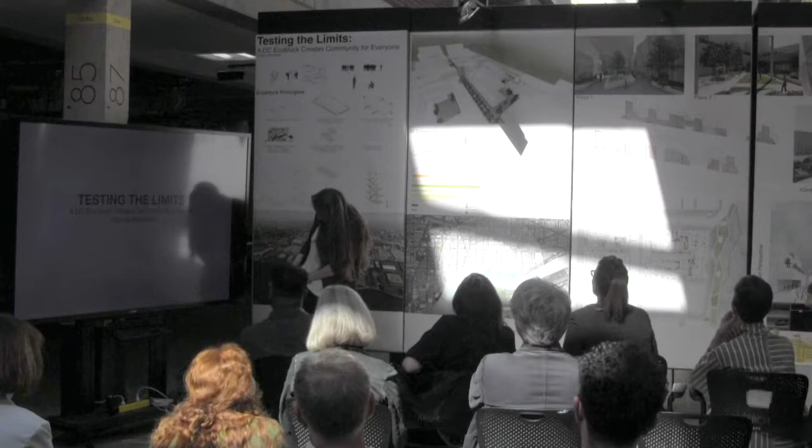Welcome, good morning. My name is Tricia Rowedder, and I'm going to be talking to you about testing the limits in DC, an EcoBlock that can create a community for everyone.

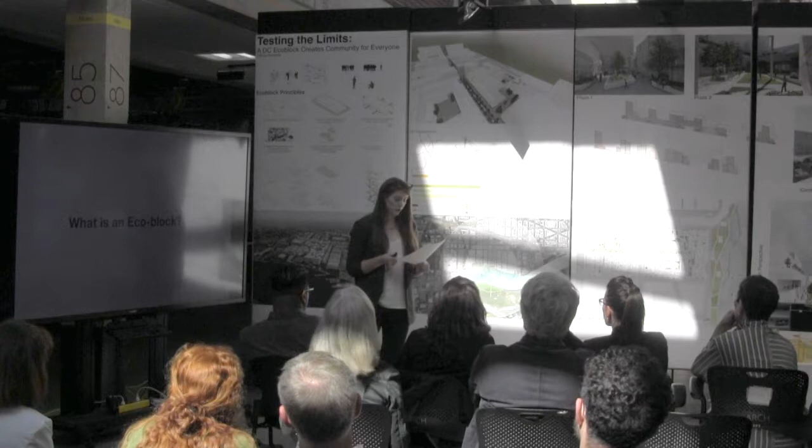This thesis explores the development of dynamic interior and exterior spaces throughout not only a building, but an EcoBlock system, so that forced and happenstance connections and interaction of people are created as a means to revitalize community in DC. This new EcoBlock requires both interchangeable as well as permanent pieces. So to start at this massive scale proposal, how do you start?

You start with 7 principles. A large area, major connection, car circulation only on the exterior of the block, porous public connection throughout the block, dynamic program, not only through horizontal applications but vertical as well, equal access to amenities for every program as well as exterior space, and then of course light and air. So from these principles, I derived an even further set of rules to help actually design this thing.

First of which is circulation. I split up the site into 4 cores, and each core has access to circulation that occurs beneath the site. And then each of those cores have a drop-off zone, a service zone, as well as an HVAC system room.

And so this service circulation happens only on the exterior, but I've allowed for emergency vehicles to travel through the center, only emergency vehicles. The rest of the vehicles will solely travel on the exterior of the block, whether that's service or typical car circulation. And then I've designed drop-off zones, which are these green ones, as well as parallel parking along the street front.

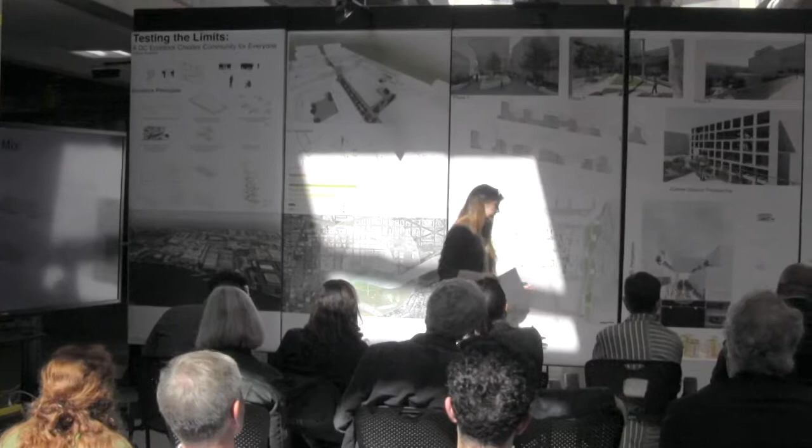And so dynamic program mix, it might be easier to see in the model, but I've mixed the program all throughout the block, and I've put it into 4 categories. Yellow is residential; red is retail, commercial; green is an innovative office that I'm proposing, and then orange is food. It might be hard to differentiate the orange and the yellow a little bit.

So I'll keep getting into that as we progress. For light and air, the courtyards I gave specific ideas and dimensions to as well. If you go up 2 stories, you set back a certain amount, 25 feet. If you go up 3, 30 feet. And you can see that on the interior corridor, I've done the same as well, where this dimension, though, is a bit smaller because this runs through the whole site. A courtyard might have more flexibility in how they shape their spaces.

So density. To tackle massing of a large scale, I had to think about how do we start with this. Looking at different sizes that would be good for certain types of program. So 50 by 50, 75 by 50, and never getting larger than 125 by 75. This allows for a good mix of program, whether it be residential, office, commercial. You're able to manipulate these. And then the smallest dimension, 75 by 25, if it got any smaller than that, I considered it an unusable space, and so there wouldn't be massing there.

So, jumping into the site. So where are we in DC? We're in the Washington Navy Yard, and I chose this site largely because it has a lot of great connections to the city, and it's a very developing area as well. But also more locally, it has the metro, it has the Nationals Ballpark, great access to the water. This is my site. And then it's flanked by the Anacostia as well as M Street, an active corridor.

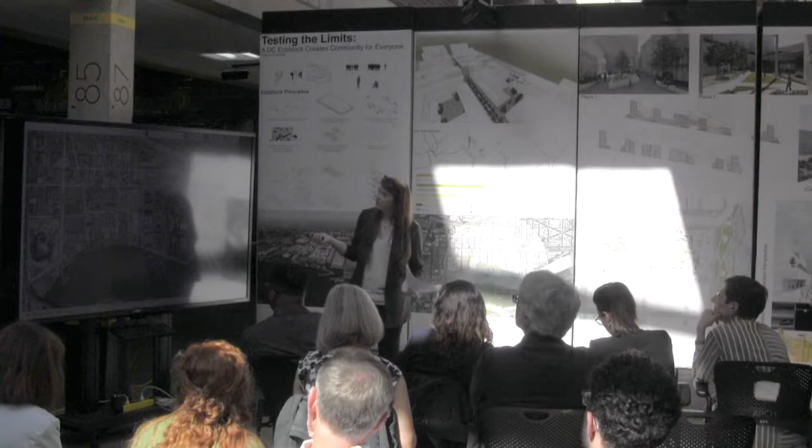There's a variety of parks and schools as well, and so when starting to think about the program and this innovation center that will start to bring people not only for jobs and activities, but also start to engage the waterfront and perhaps bring the kids from the local schools and the offices as well.

And then I proposed new roads. So as you can see, the road here didn't align with the street above, and as well this one didn't connect through either. So I connected both streets and then provided an access through the center of the block as well. Block extents: my site was 400 by 1,000 feet.

So how did I start to mass it? I broke it down into a major axis, one going north-south, connecting M Street to the waterfront, and east-west to the new streets. I stepped down towards the waterfront to allow for the light and air to be able to get into these spaces that I'm going to start to carve these courtyards out of. And then at the end, I stepped back up to allow for that opportunity of development along the waterfront.

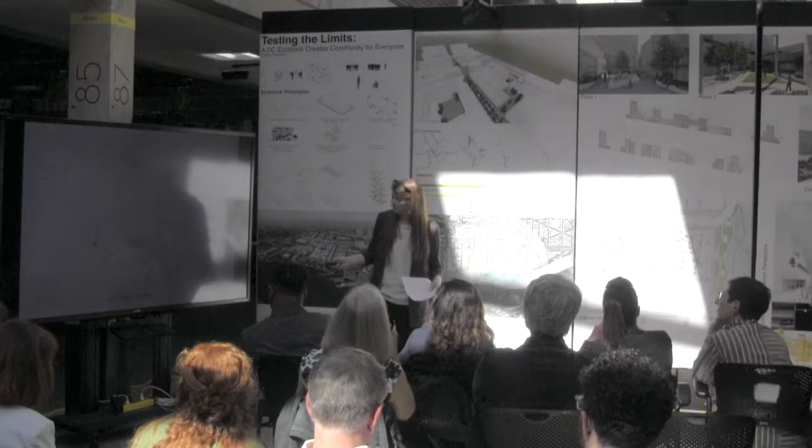Then I located different nodes of interaction that I was going to carve out, locating based on current site conditions and programs surrounding how big and where these were going to be. Next, I carved out each of these blocks, varying in sizes and opportunities of program and connection all around them. And lastly, you have the EcoBlock.

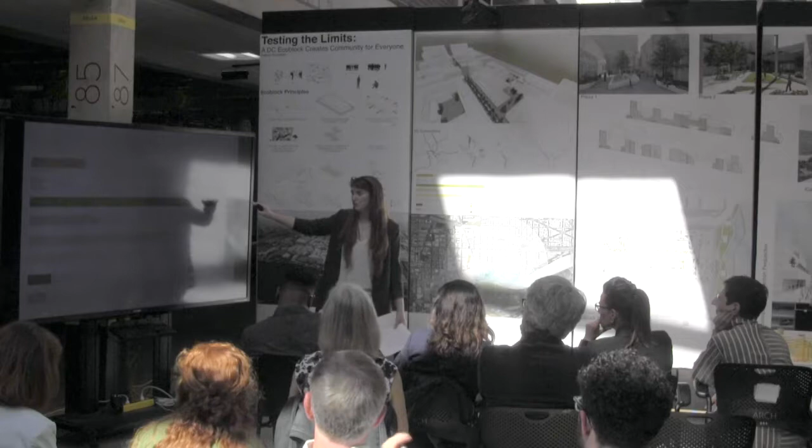So, in my EcoBlock, looking around to the current community around it, this is food, this is the local community, this is how much I have on my site. Green is office and institution within the quarter mile, and the lighter one is my site. And then again, it goes residential and then retail. So you can see I tried to have a mixture of program that correlated somewhat with the population in the area and the rich development that's starting to occur.

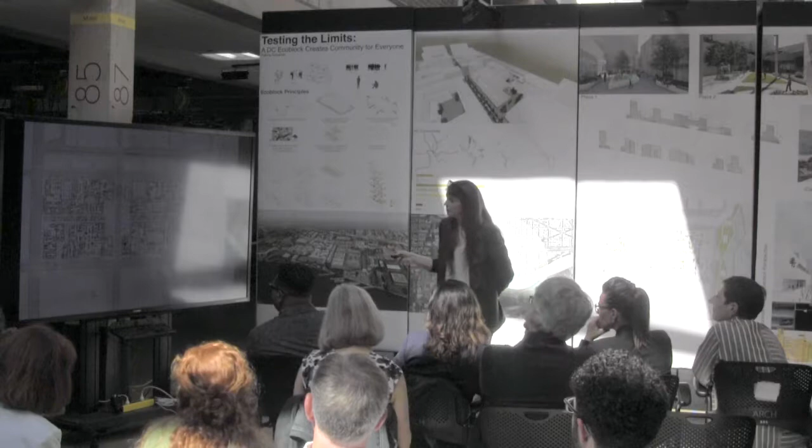These are some of the courtyards, the landscape that I chose to connect these quadrants that I designed. Sorry, it's hard to see. And so the ground floor plane, I did a mixture of retail, office, and residential here, as you can see, and we went through this a bit as well. But I designed it so that it could be divided up into parcels. This is how I divided it up, but let's say you wanted to divide one piece or this piece, you could completely sell it off.

And so I started to look at how could this actually develop? Who would want to buy a piece of this? How could you break it down and still create these rules and set of guidelines for someone to come in and design and develop a piece of this, but still fit into the whole? And so each of these pieces correlates to that, how I did my massing for it. But theoretically, they could be developed a little different if following these guidelines.

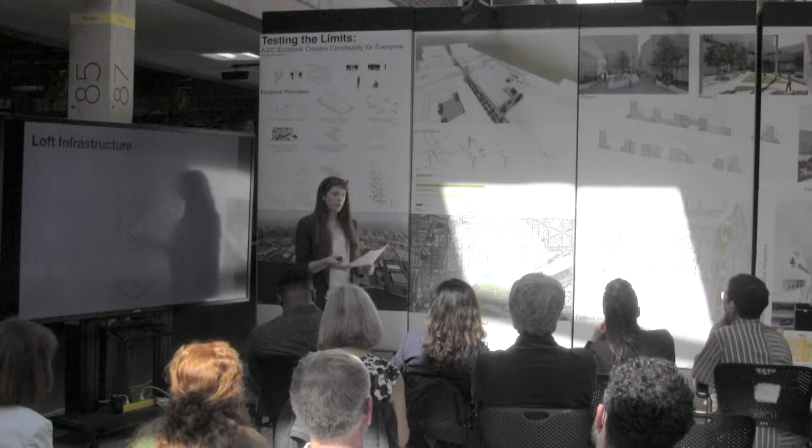So, loft infrastructure. I chose to use a loft as the type of construction for my site. It utilizes a flexible and open framework that easily adapts to changing cycles of use and maintenance and creates a community that can continue to flourish and adapt over time. So building in this modular way, I'm able to create a more resilient site that can last in the long term, as well as accommodate all the different changing lifestyles that occur in an urban city.

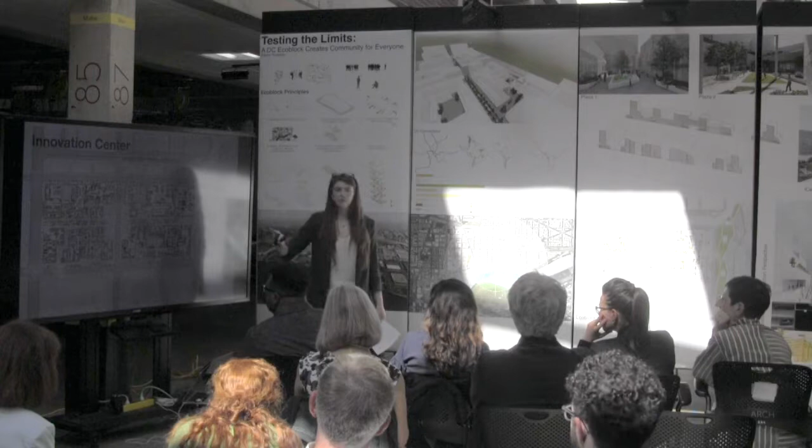So creating this new EcoBlock neighborhood addresses this need for real social networks and a sense of belonging in a highly individualized society that we're in today. So diving a bit further into detail, I massed the whole site and developed the ground floor, but then I jumped into just one parcel of it, one building, the Innovation Center, and this would act as the hub of the green program I've designed that's connecting the whole site and the entire block.

And so reading this plan, as you go up, the blue is going to be open to below, and the orange is the privatized spaces. So on the exterior, the party walls, I aligned my cores, and then I developed a mixture as you go up through the floors of different types of interaction, whether that be closed office spaces, open office spaces, meeting rooms, collaboration centers, classrooms, labs. And then I also included terraces. I started punching into the facade because of this easy floor plate of the loft design. I was able to manipulate it very easily.

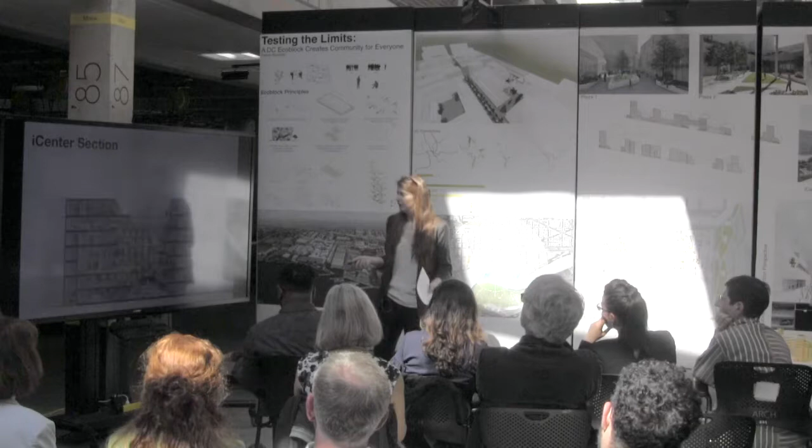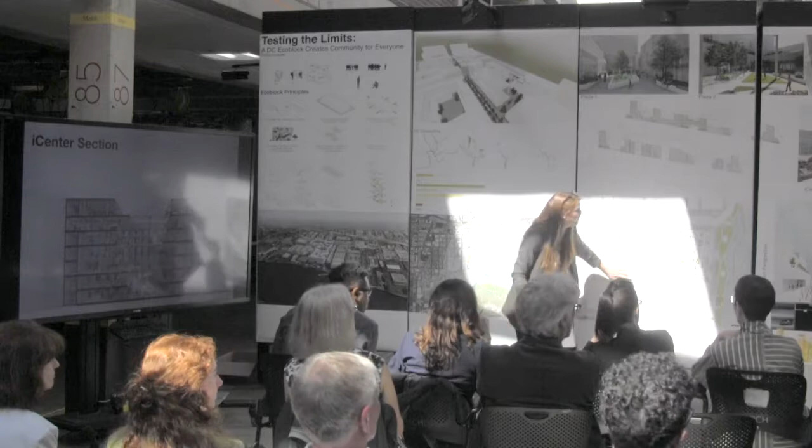So if you're looking at the section, you can see some of these different types of interaction all throughout. Yes. I'm a little lost, so I don't want you to go too far, because where is that in relation to that? Okay, so it's right here. Okay, so is this the same orientation, north is up? North is to the left on these plans. Yes. This is the entrance right here. Point that out in your ground floor plan there. Right here.

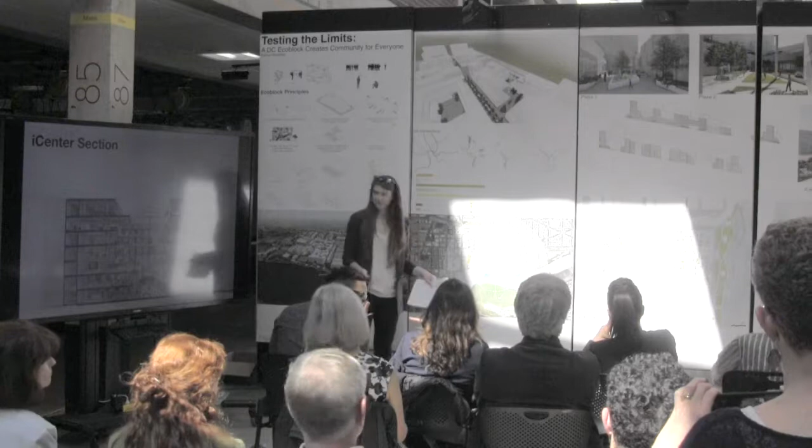So going on to these nodes of interaction and connection that I started with, looking at just a couple of these and their relations to the site around them, whether it's on the exterior or on the interior, looking at these meeting spaces and how they join the collaboration, the circulation zones, the dynamic lobby spaces, the plazas that connect these retail along with all these offices, as well as these terraces and how they relate to the adjacent areas. And I'd like to conclude.

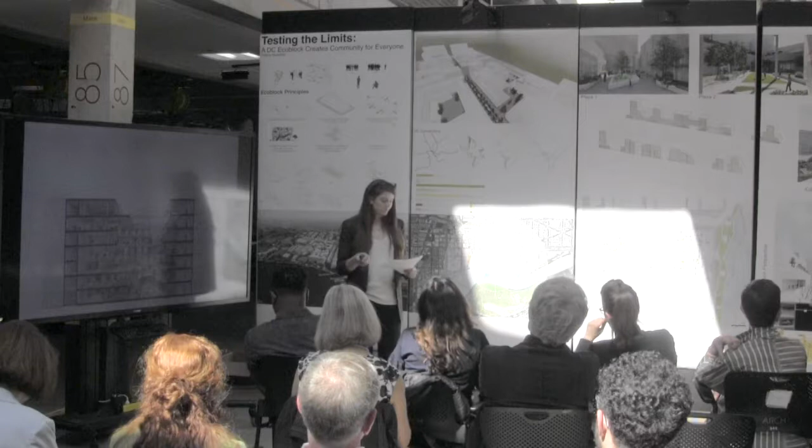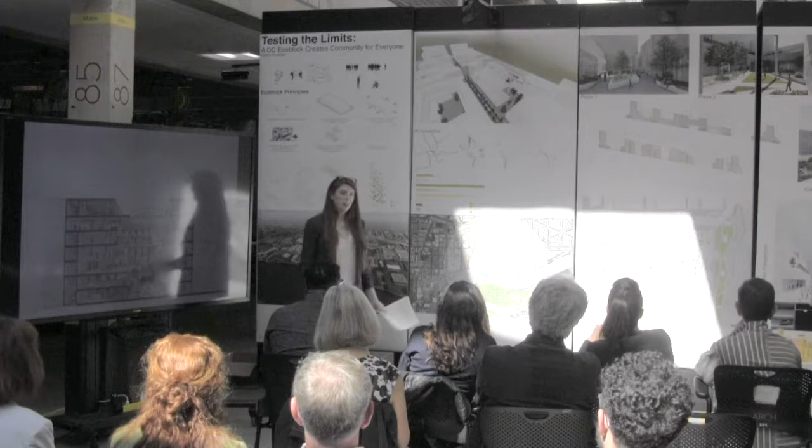So building in blocks can have a sense of inclusion and diversity and community by creating this spectrum of spaces that are a variety of scale and allow for engagement not only with one another but as well with nature. So not only does this present a possible solution, or at the very least an aid to this epidemic of loneliness in DC, but it can infuse the city with a sense of belonging and personal connections to one another, as well as their surroundings. I'd like to open the floor for any comments or questions or concerns.

Is this on? Well, thank you. It's an ambitious project. I've had a student do the same site, and it was very difficult, very big, very deep, and needed housing here. So it was an extremely difficult site. And I want to thank you, it's an ambitious project. It's ambitious and forward-thinking. In a sense, you're designing for the 22nd century of DC almost. Density is increased. It sort of reminds me of Osaka or Tokyo in terms of its urbanism.

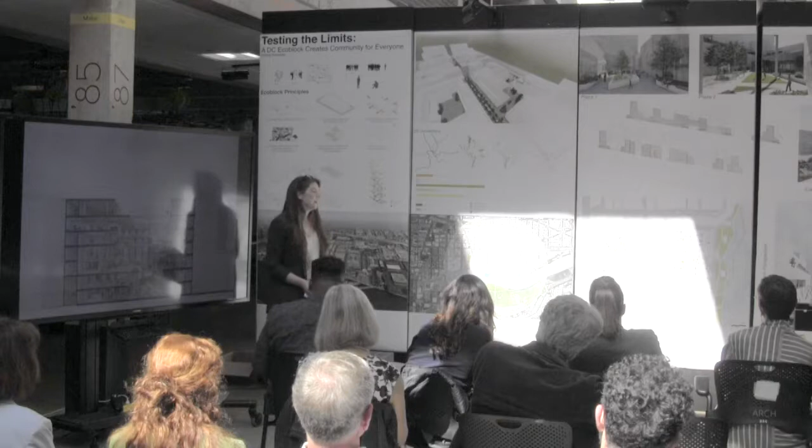Did you look at the Japanese, Asian cities? Yeah, I looked at a couple of them. I looked at Chinese superblocks as well, starting in this. I also looked at Metabolism and Archigram and all those different precedents when starting the process. What did you learn from those? Why do you think they work in Tokyo and in Japan, and how do they need to transform, or what needs to happen in DC for that to work here? Sure. I don't necessarily know Tokyo, Japan quite well. I know the movements at large and certain specific superblocks that I studied more in depth.

But a lot of them tended to fail because while they were implementing these big principles, they had the right rules that they set up, but then the follow-through fell through. And they created often very individualized pieces, and so this didn't really allow for interaction amongst people. I would imagine that in Tokyo, Japan, the population is also very high and that this might work as well. Especially in DC, I think it could work because of the increased population and the drive back to the city.

Well, one of the reasons it does work in Japan is the density. You go up 3 or 4 flights to get to a restaurant, and there's retail on the 10th floor because you have to. There's not enough street edge. Right. The ground floor retail and residential or office above is not the tradition. It's just you can't have it there. It's just too dense. So I think your project can work, but I'm not sure.

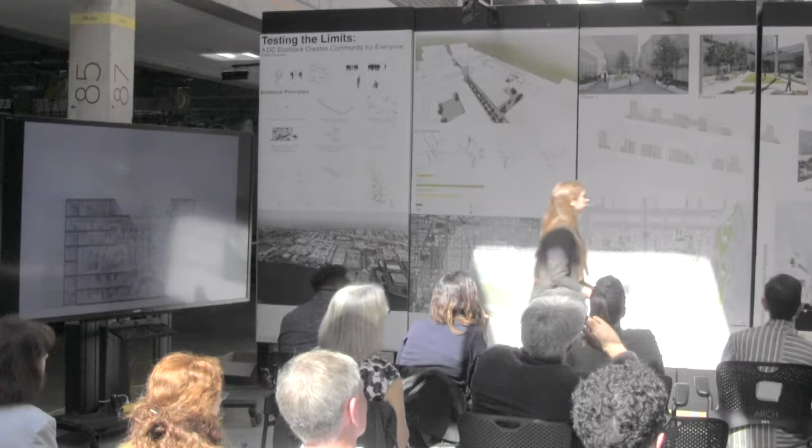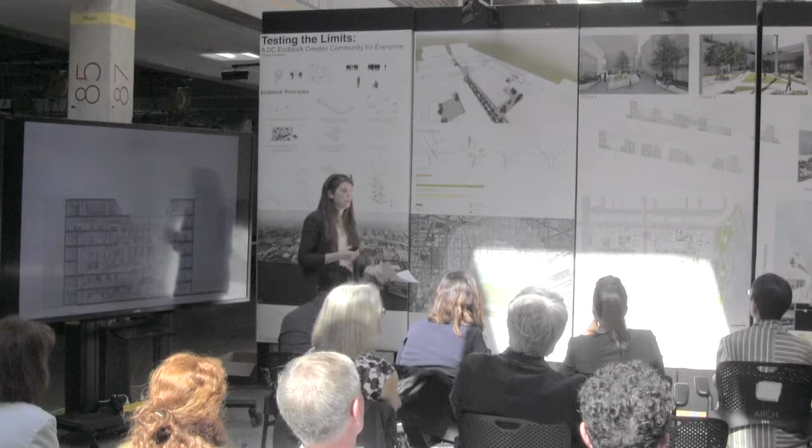Yeah, so for my building, I just did a very simple grid structure of the facade that aligned with the columns. It was more that I had to deal with my own taste, I think, really, than speaking to the site particularly. The idea with the loft building is that you have a lot of flexibility in how you can design the building, what you can cut out and what you can put up as a facade. So the design of it becomes very open-ended to those who want to design it.

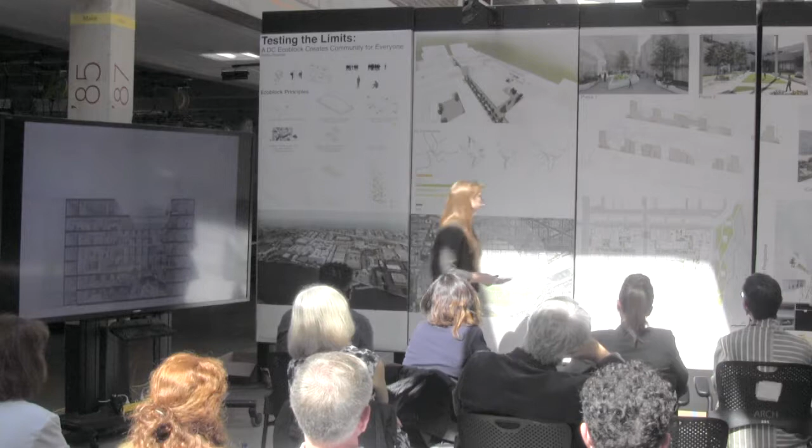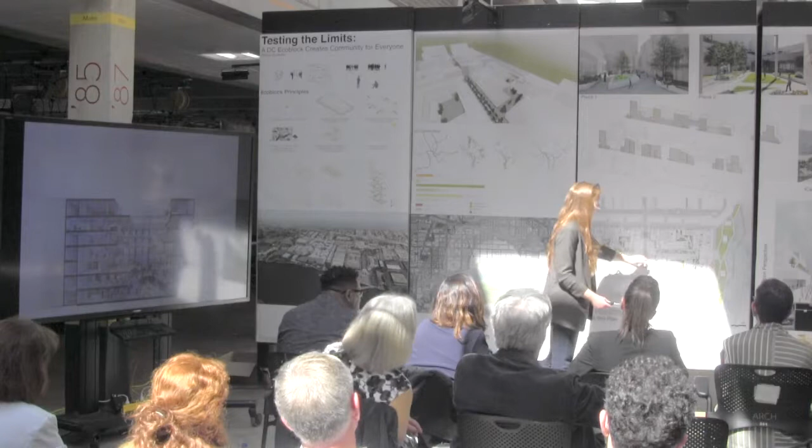As for accessibility to the site, I was also very concerned with that, which is why I tried to make very strategic points of access. This is a parking lot that will always remain a parking lot because it connects to the Anacostia waterfront trail, which starts just further down my site, and then it ends at a closed boardwalk before coming to the rest of the Navy Yard. That's a controlled point. So my site really now becomes the end of this trail until you pick back up a while up the river. I tried to choose very strategic points of access as well as give a lot of room between the buildings so that it appears as if there's a lot of space and it's very open and anyone can come in, because I think in DC we're often used to walking into big plazas and it feeling inviting.

So is the idea that developers would come in and develop a certain parcel of it, but the massing would have to match the preconceived massing that you have?

The massing could shift slightly, but the idea is that by following these principles, your building would turn out a pleasant building with experiences—that would be the hope of it. But the massing could shift slightly. I proposed a massing that followed these rules, and I guess they could, and a facade design.

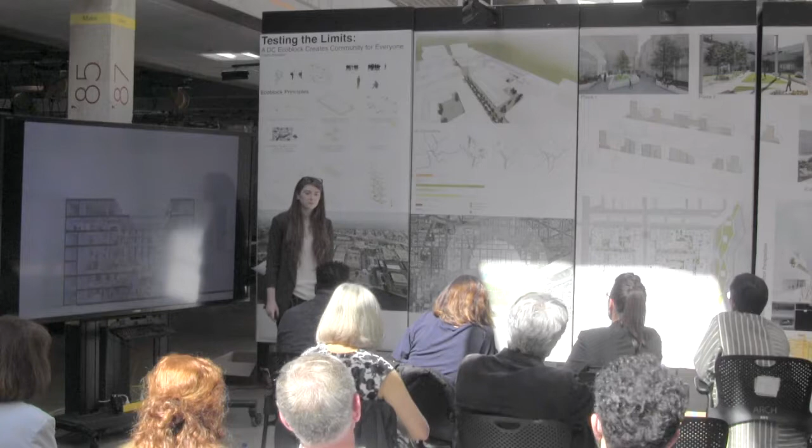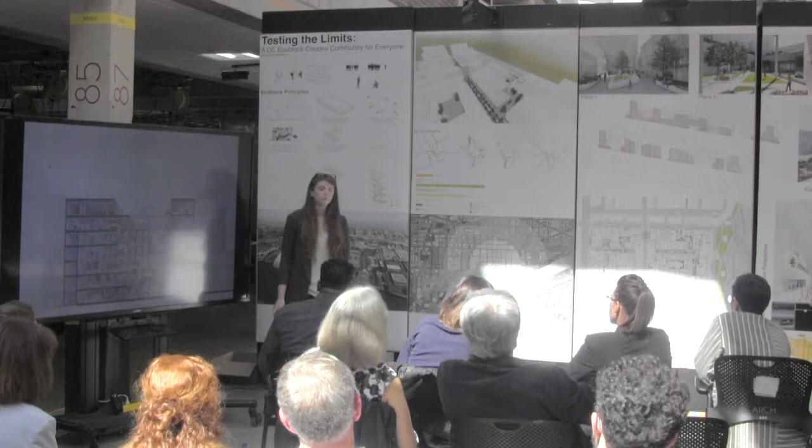Can you talk about—I think you started to get to the comments you were just making. I understand your principles, and I was trying to understand if you perceive this to be a completely developer-driven project, or if the intent of your thesis was to set out an approach to development. Your principles are great at a higher level, but it's hard for me to make the jump from your principles to the actual forms, and it's lacking a little bit more detail. I wonder what your thoughts are on why someone wouldn't just max out FAR and make the code work. How do you actually implement this? I say that in part because I think, in order to make this actually thrive, you need a slight bit more granularity as to how you actually begin to define the rules.

Yeah. Did you think about that anymore? I definitely did. I kind of dug too deep into details, I think, and at that point it got almost impossible to design the site as a whole, so I had to step back.

But I think setting up those three modules that you can use to build, and then requiring that you have access to the block as well as the courtyards, have to step back every so often, similar to how you'd think of buildings in New York with the setbacks. I think I was proposing a way to help control the development without fully designing every nook and cranny of it. So I was trying to make a feasible proposal that someone would see and then could come in and design part of it into further detail. I guess I don't know if that was getting at your question.

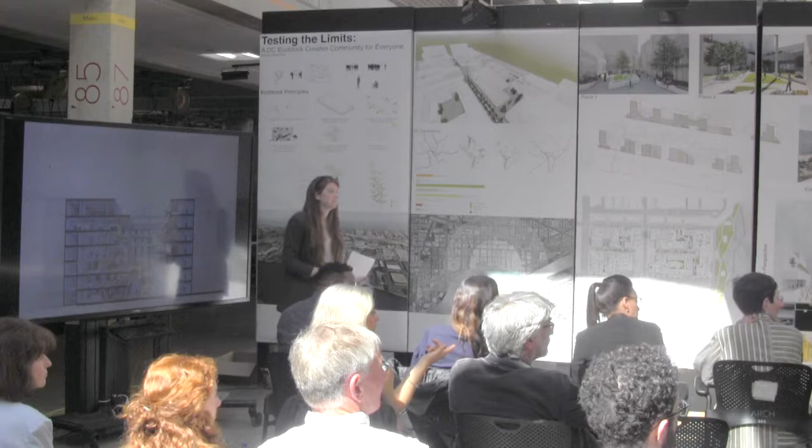One of the discussions we had, just to clarify—I was a late-breaking member of the committee—was this question of dimension and ventilation, and sometime in the future buildings get a little narrower because we want to naturally ventilate them. I think, Tricia, I would argue with one thing you said, which was that this is one way this could be realized. You lay down the basic cruciform with the square, and if you follow the rules, which aren't maybe completely articulated, there are lots of different ways that this complexity inside the block could take shape, as long as the outside does the things you wanted. I think that's one of the things we were talking about.

Right? Absolutely, yeah, absolutely. So a question I have—you talked before about creating community and that cars should remain outside. I think there's a missed opportunity in looking at some precedent studies for ways you can integrate cars and pedestrians, specifically Copenhagen. Copenhagen has a wonderful system where pedestrians and cars overlap safely.

What strikes me about it is that you have this super block and you've cut a slice right through the middle of it, and you've kind of done nothing with that big space in the middle. It seems like a really big missed opportunity.

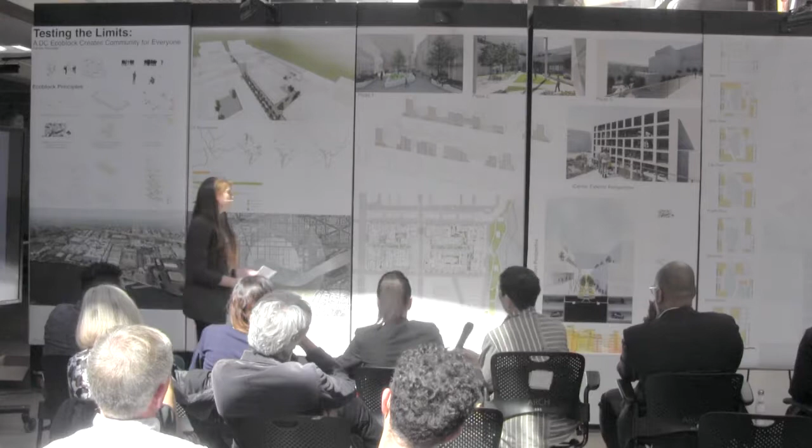Yeah, absolutely. So to the east of the site, if north is over here, I put a street, and I also developed on the east side of it something small scale, whether that be residential or something, to create a buffer between my EcoBlock and the Navy Yard, and allow the street to act as a uniter between these two sides rather than something dividing the fabric. To the west side, these buildings are slowly, if you saw in plan, stepping back as they reach my site. I was hoping my center would start to be this core, this point of activity, that would then spiral out into the rest of the site. So this would act as that catchment.

I do agree with you that I missed some opportunities in developing that further. I think I got a little bit lost in a lot of other things.

There's a huge scale thing where I feel like you don't even need to show a plan. You don't need to go into the intricacies of what's in it. Who cares if there's a table and chairs or not? I feel like it would do you well to step that back and just diagrammatically show, not dissimilar to how you're doing your initial work, how the space is used, how it functions, and how people will interact. It's for people, so you might do a series of those diagrams.

Yeah, absolutely. Thank you. I have a quick question on that. The non-innovation center floor plans on your ground floor plan, what program are they?

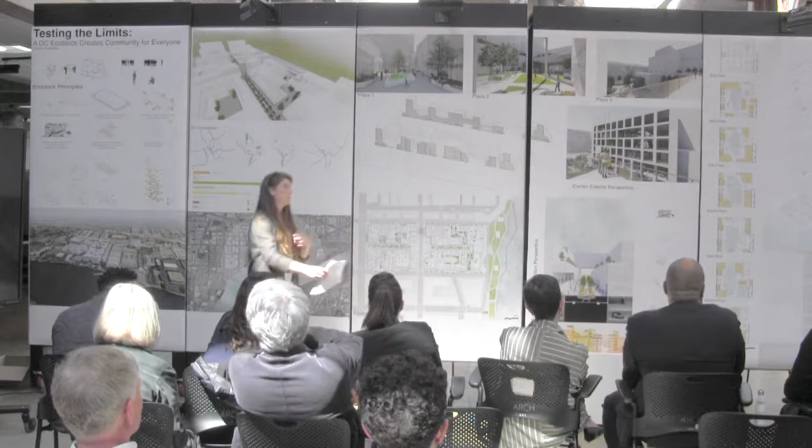So there's this issue of what's private and what's public, and so I started to define some more privatized spaces while leaving some more open. I didn't necessarily label specifically each one, but I was trying to get at that that you were mentioning.

Tricia, again, first of all, for your parents - she's graduated, so don't worry about this. She's going to have a degree in a week or so.

With that said, I'm a little confused about how to critique this project. In some ways, the project is for 50 to 100 years in the future, but other times you're talking about it as a developer today.

So for example, the Navy Yard, you're assuming that's going to be stationary, and you're assuming that the way urbanism is done in Washington is going to stay stationary or static, when in fact, I just know that Navy Yard is going to go away one day. It's going to change, it's going to be like the Philadelphia Navy Yard, or it's going to be base consolidation. I think there's some issues of, is this about the future or is this about today? When is this going to be done? When did you imagine this is going to be done?

Set a year on it. Okay. I think that I was trying to merge the two. I was trying to be very forward thinking, but I was trying to start to apply some practicality of what actually is just starting to be developed today. And so I was struggling between the two, I think, when designing this.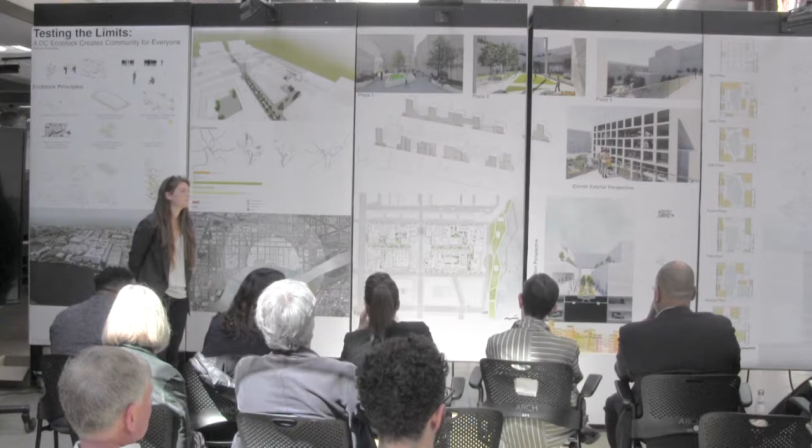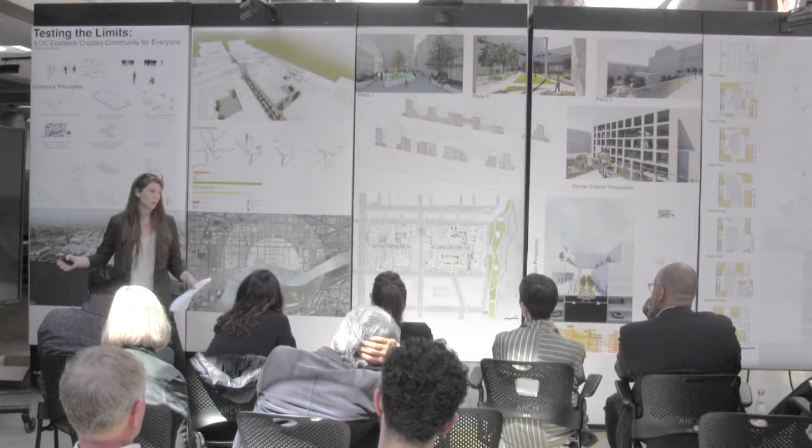I don't know a specific city off the top of my head, but someone mentioned the Gothic Quarter in Barcelona, and I know that area very well. I studied there for several months. I was looking at how the buildings were defining those spaces, and it forced people to go to a specific spot, or it allowed more open areas where you got to choose. So I was trying to understand how I could make some of this where I'm forcing them to end up in a specific location, whereas in other spots it's more flexible and really up to them.

What do you mean by force, Tricia? I find that word so jarring, and I don't think that you intend that jarringness, right? Right. So what do you mean by that? I think what I mean by that is a specific intention or a very directional design in which it's very clear to the user the function of the space and what you do in the space.

I guess, if someone feels forced, they could turn around, right? So is this a spatial idea, or is it about desire, that I don't have many options, I can go forward or I can go backwards? Or in the space where you say it's more open, there are more choices. I would much rather feel an environment where I'm moving forward because the architects created a desire. There's something enticing me to go there, as opposed to feeling like I'm in a cage. Maybe you could speak a little more about that, because I know you don't mean a cage. Yeah.

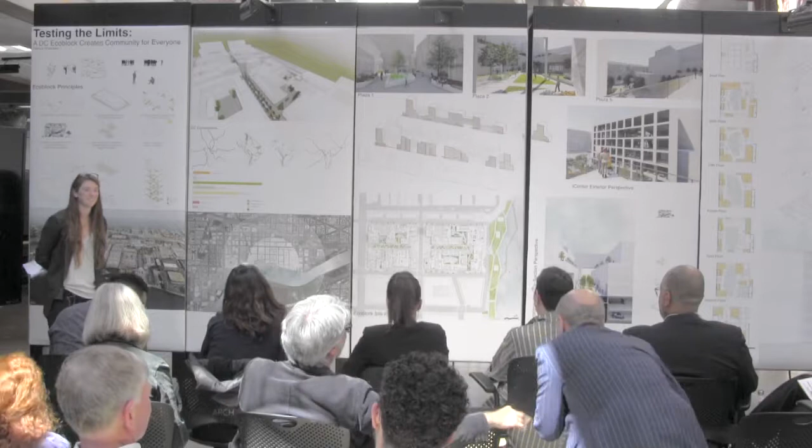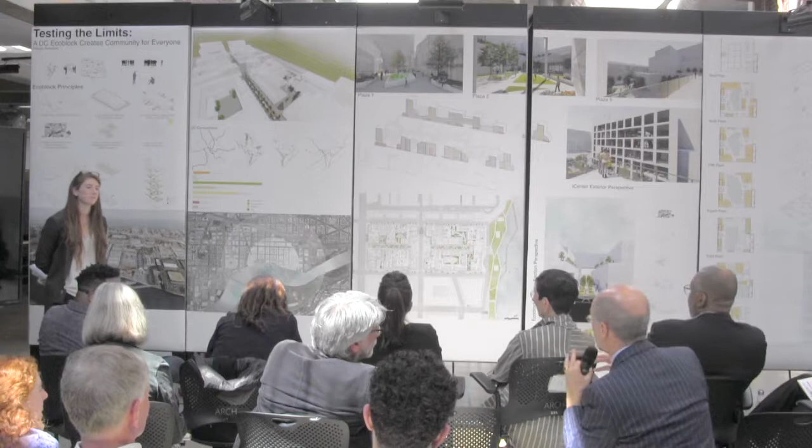Patricia, this is a really great effort here. Congratulations. One of the things, as Amy Weinstein was talking, that made me think about this was that as designers we make choices in the process. And there's a lot of choices you made about the character of street, the character of courtyard, the character of plaza. And as a result of that, the sort of ecosystem that weaves between the built world of your building seems to me to be very fragmentary.

And I wonder if one were to be a little bit more frugal about the building, to make the building more compact in its footprint, and to go back to what Amy suggested about loading the streets with more energy, that maybe some of those courtyard spaces might compress a bit, the streets might become more generous, and we might think about the relationship between the riparian environment along the Anacostia and these fingers that go back as filters, really, for the kind of environment, the streets, the runoff and stuff like that.

Right now, the landscape that's being shown, not only this comment about the green roofs being absent, but also the ground plane, just seems fragmentary, and there's a trade-off of all these little private courtyards, which I think are places to be lonely, versus the description of the street, action of the street, that by minimizing those a bit, you would actually give yourself a little bit more room to create a much more coherent green environment pulling things together.

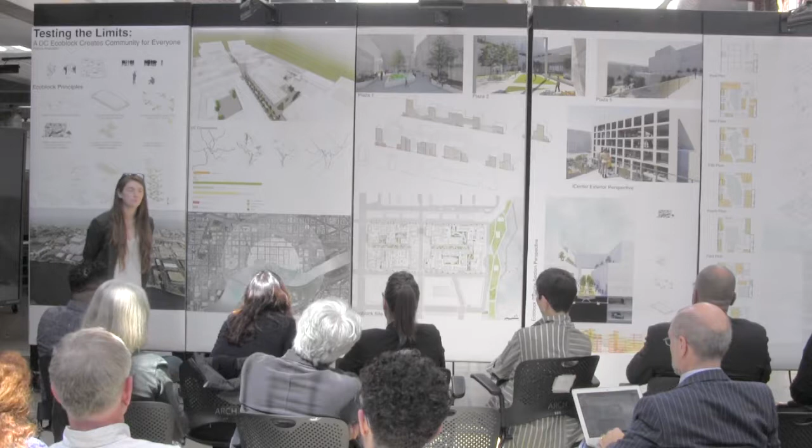Another thing I just want to point out is that it's been really interesting to see how this project became as much an exercise in exploration in how to represent these ideas as it was about what the actual forms would be. And I think the representation and really dealing with issues of scale and how do you make analogies between known things and new things is something that's been a great lesson for you. And the model is a really interesting late-breaking development in that.

And so I think this question of how can architecture and urbanism really improve the social life of cities is not a new question, and you're taking it up in a new kind of way, and infusing it with other ideas like how do you tie it into the natural environment and how do you foster innovation. So I think that your persistence has really served you well in this process, and so has your rigor and your curiosity and your good humor, and your willingness to just say, all right, I'll try that.

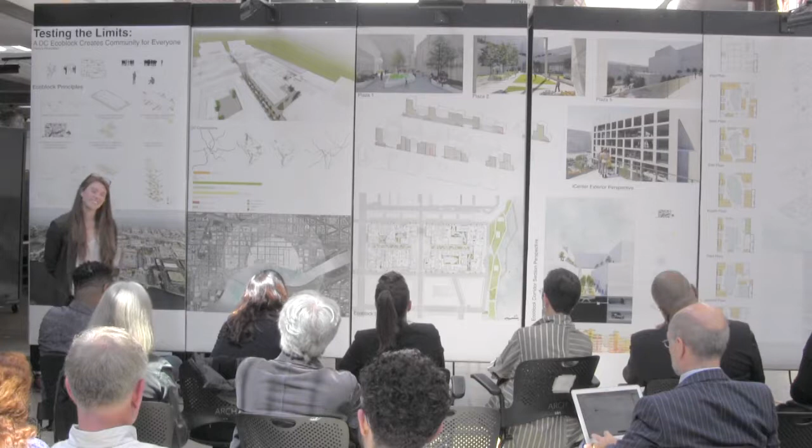And what Matt said, I want to just reiterate that thesis is really about tackling something big that's going to serve you throughout your career. So I don't think there's any danger that you're going to run out of fuel. All of these things are little nuggets of intense energy potential. So congratulations. It's been great.